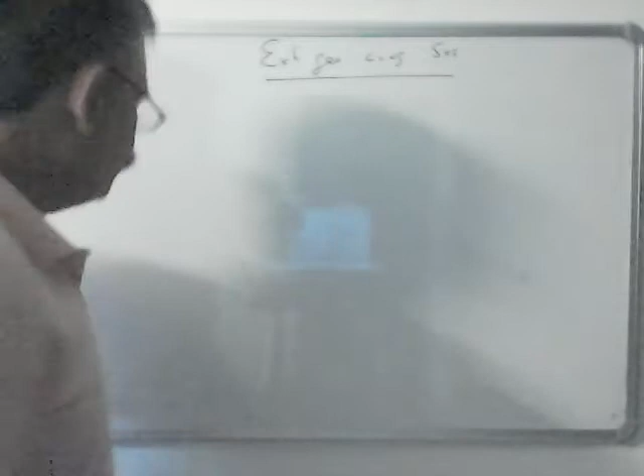Today we will do exhaust gas cleaning system. Now from 1st January this year, there's a regulation that all ships have to use either low sulfur fuel oil or exhaust gas cleaning system. This is for deep sea IMO regulation.

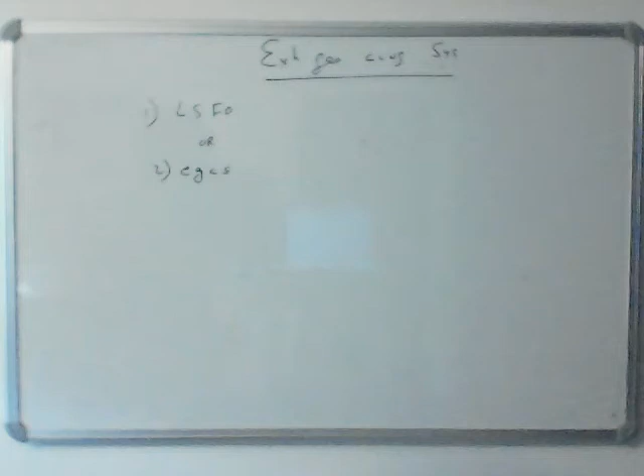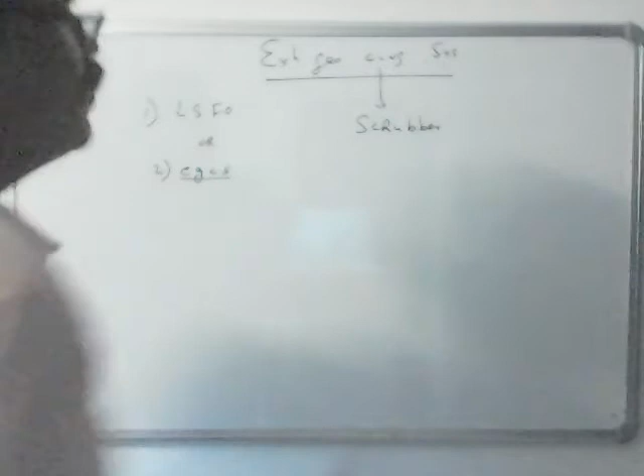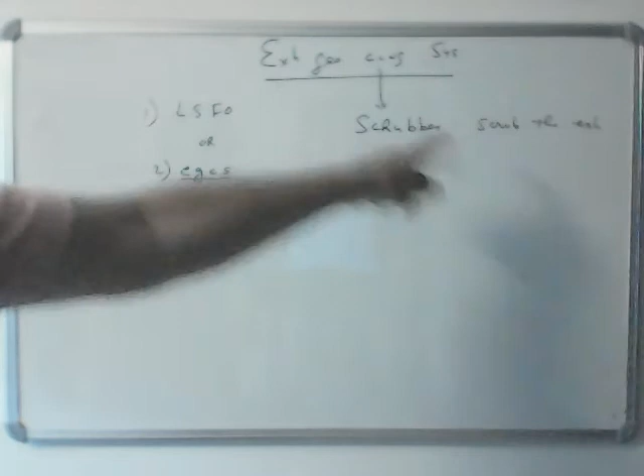So ships which are fitted with exhaust gas cleaning system, this is also known as scrubber because seawater is used to scrub the exhaust gases from the main engine. And on some ships, even the exhaust gas of generators is also scrubbed with seawater. So this scrubber is something like what we have, the inert gas scrubber on tankers.

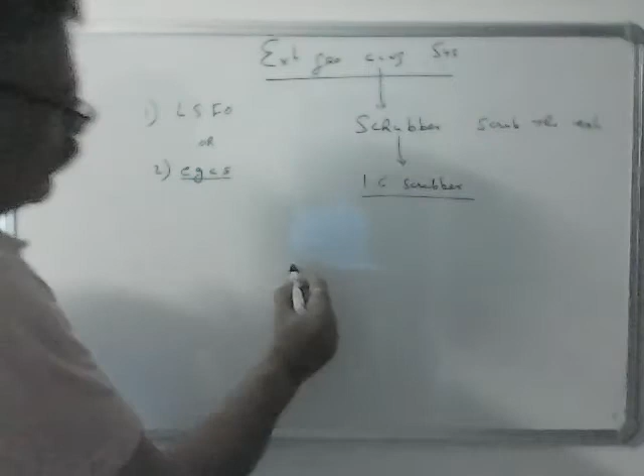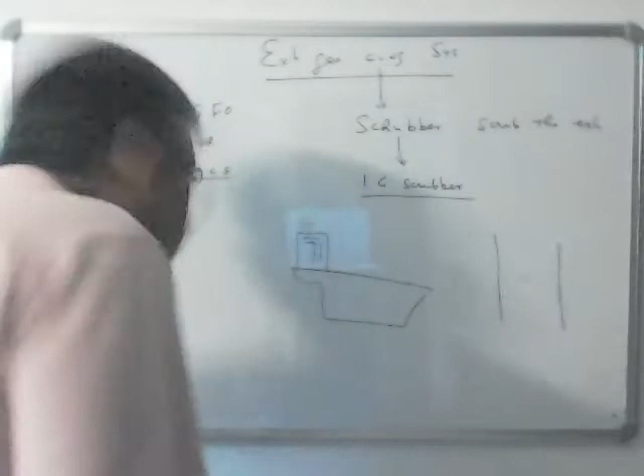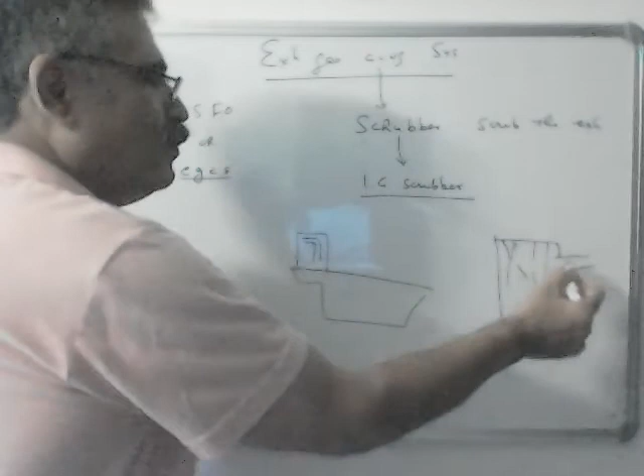Here also the exhaust gas of the boiler is sent to the scrubber, and in the scrubber tower, this is called a scrubber tower. The exhaust gas is sent inside the scrubber tower, and here you have seawater from a saltwater pump which mixes with this hot exhaust gas and absorbs all the carbon, which is soot, and all the sulfur.

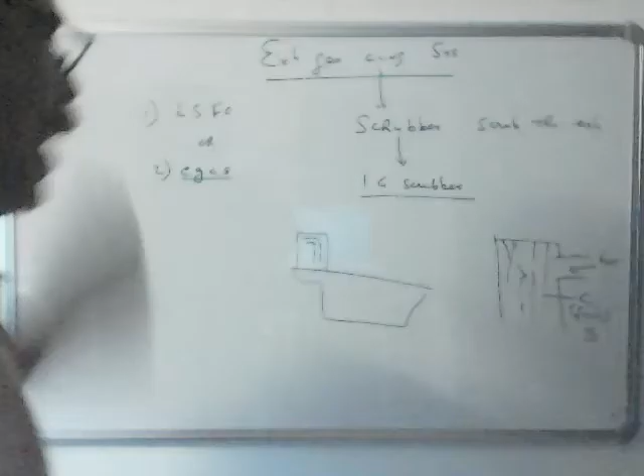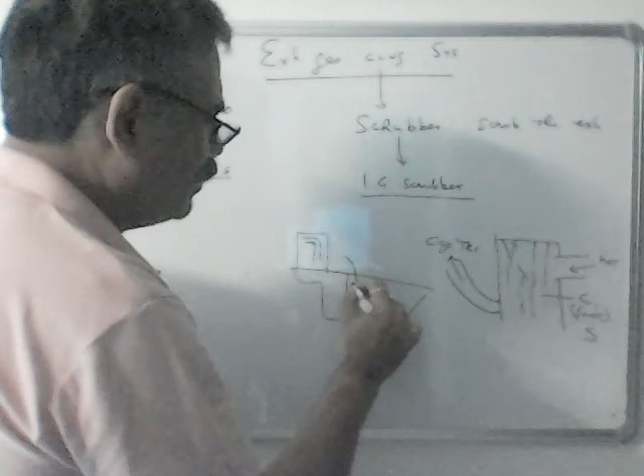And then the gas is sent to the cargo tanks. This is in tankers. So this exhaust gas after the scrubber unit is called inert gas, and this inert gas is sent to the cargo tanks. So this is in tankers.

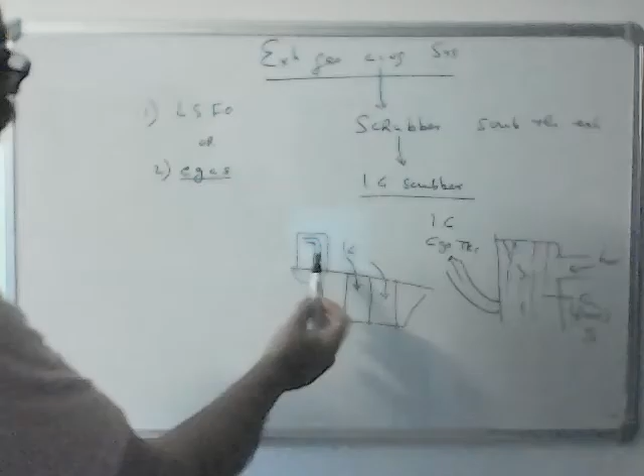Almost the same thing is done in the ships now, but in the ships, the exhaust gas from the main engine and also on some ships the generator exhaust gas is sent to the scrubber tower. Again, carbon and sulfur is removed, and also some harmful gases like carbon monoxide are also removed, and the resultant is then passed out in the atmosphere.

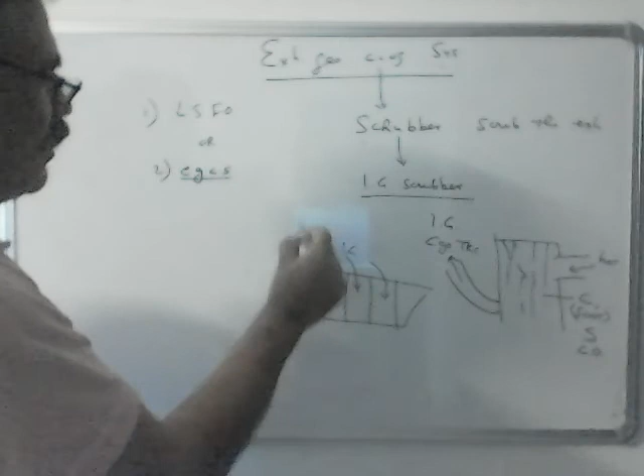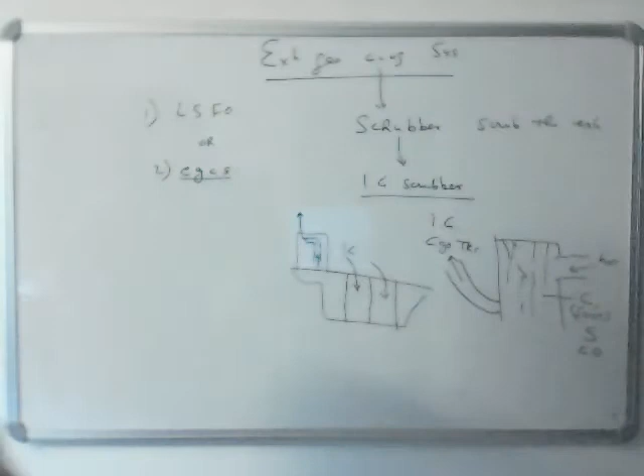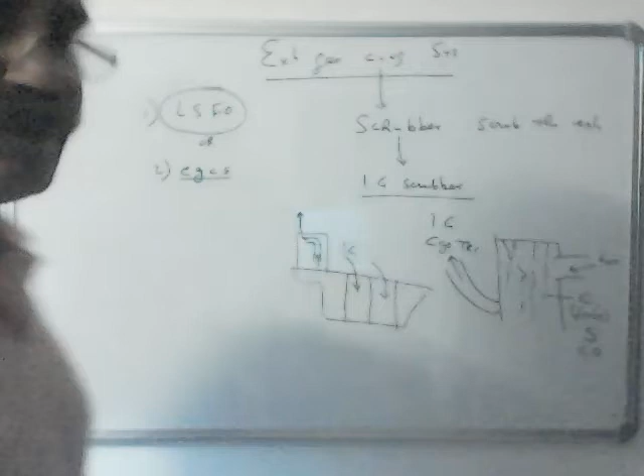So in case of any malfunction, you get an alarm in the exhaust gas cleaning system in the engine room. If you have to do some maintenance on this system, then you have to change over to low sulfur fuel oil and then carry out the maintenance. Later on, you can again change over to exhaust gas cleaning system. So this is for deep sea.

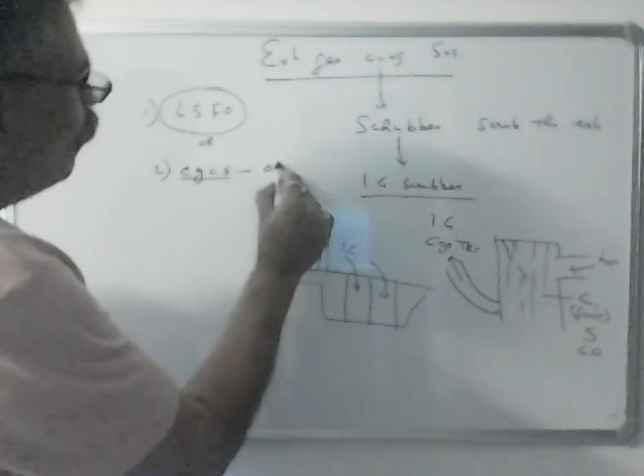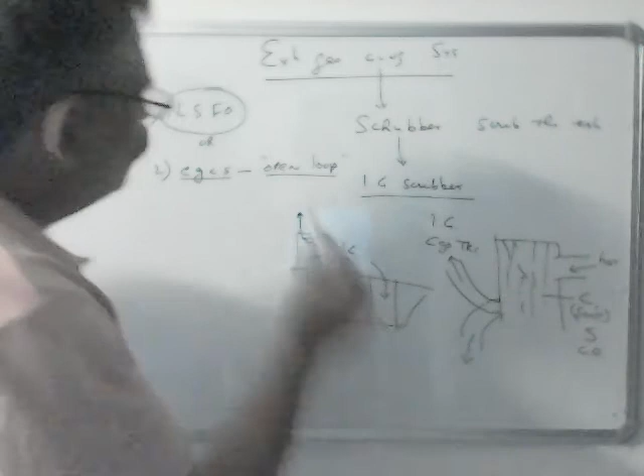But if you are entering port, you have to follow the local regulations. Some ports do not allow exhaust gas cleaning system with the open loop type. Open loop means the salt water after the scrubber is pumped overboard. That is open loop. Now this salt water which is pumped overboard contains sulfur which has been absorbed.

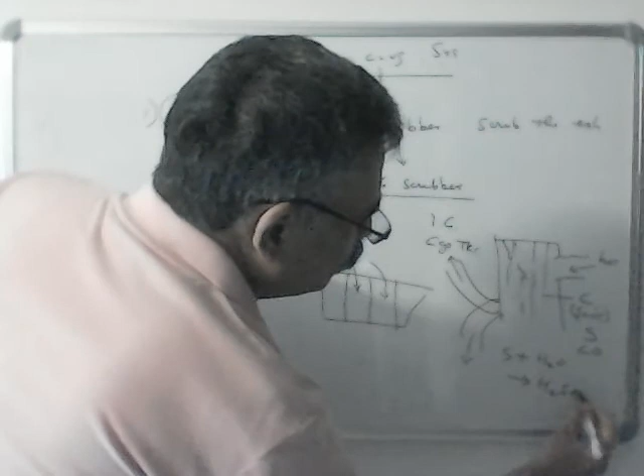So sulfur plus water gives you sulfuric acid. So dilute sulfuric acid is pumped overboard. So it causes some pollution of the sea, which some ports do not allow. But this system is allowed in the deep sea because the pollution is very small.

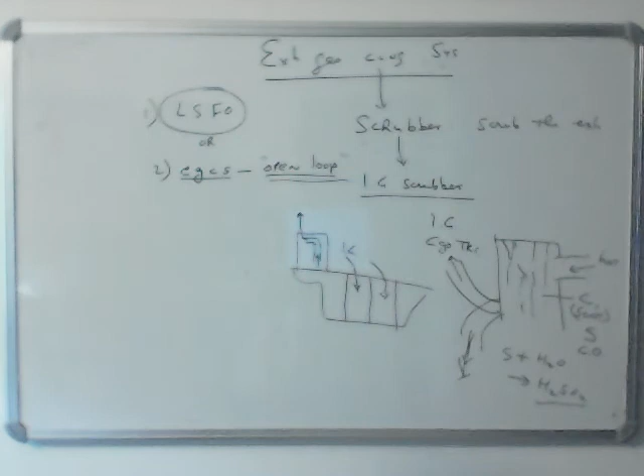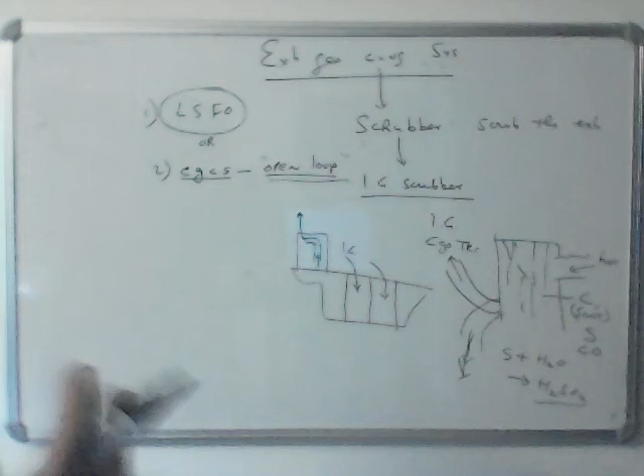On old ships where a scrubber unit is being fitted or has been fitted within the last 1 or 2 years, you will find an extra funnel. For example, this is the normal funnel, and here you might find another funnel. So this is the aft funnel.

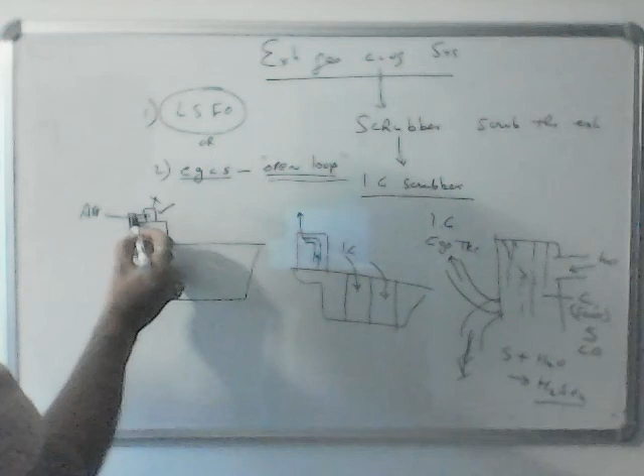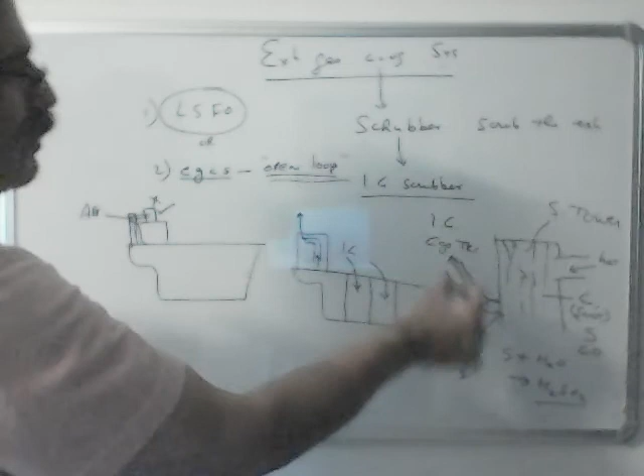So since 1st January, this funnel is not being used because this regulation came from 1st January. So all these exhaust gases are passed to the aft funnel, which has got a scrubber tower. This is a scrubber tower. And here there is the scrubber unit, and after being cleaned, this gas is passed to the atmosphere. So this is about EGCS.